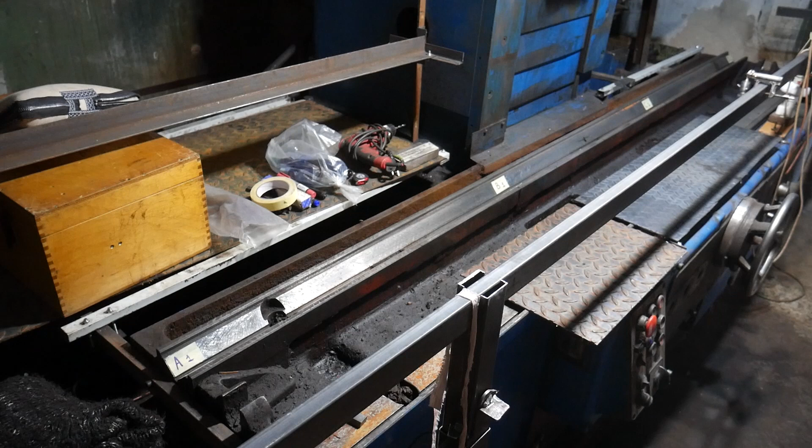I continue working on the repair of the 3-meter guideway of the linear motion system on the surface grinding machine. This repair has been previously covered in my videos number 20, 25, 26, and 27. The process of such a repair is complex and multi-staged, and I believe it's better to present it in parts, with each part dedicated to a specific action as it is completed. I've now completed another phase of the work, so it's time to make and publish the next video.

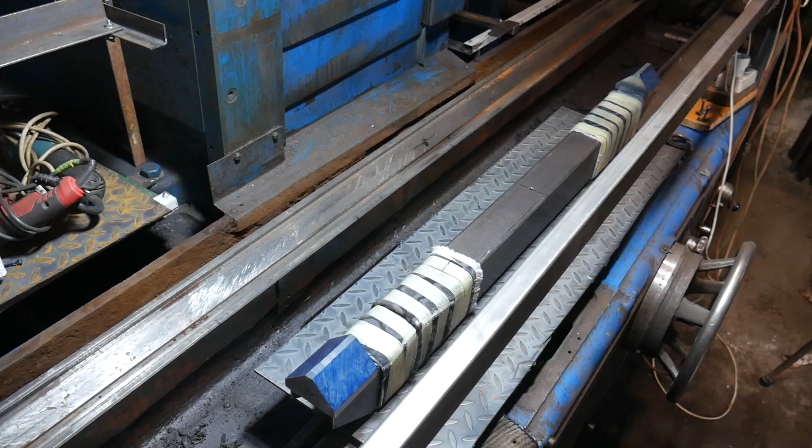Up to this point, I've already accomplished quite a lot. First, I conducted the necessary measurements of the guideway's condition before the repair. After that, I began the process of restoring its straightness.

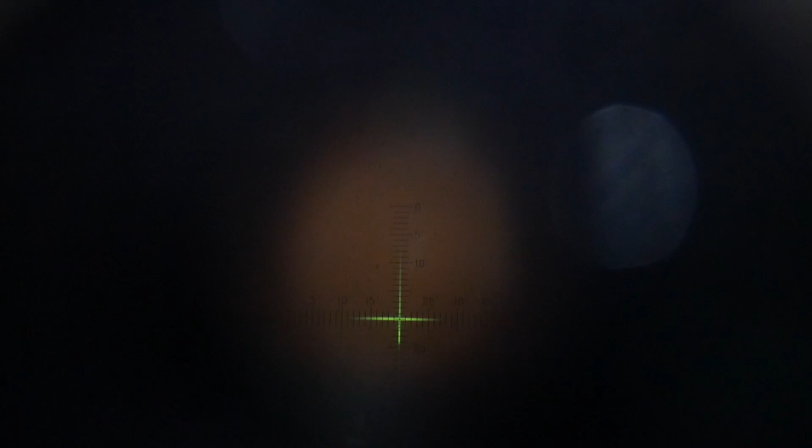Initially, using the autocollimator, I determined the geometry of the guideway before starting the repair. It turned out that the wear was such that the maximum difference between the highest and lowest points on the guideway surface was slightly over 0.5 millimeter. I say approximately, because the worn, curved surface complicates precise measurements, and extreme accuracy at this stage isn't necessary. The main goal was to get a general understanding of the guideway's geometry to know how to proceed.

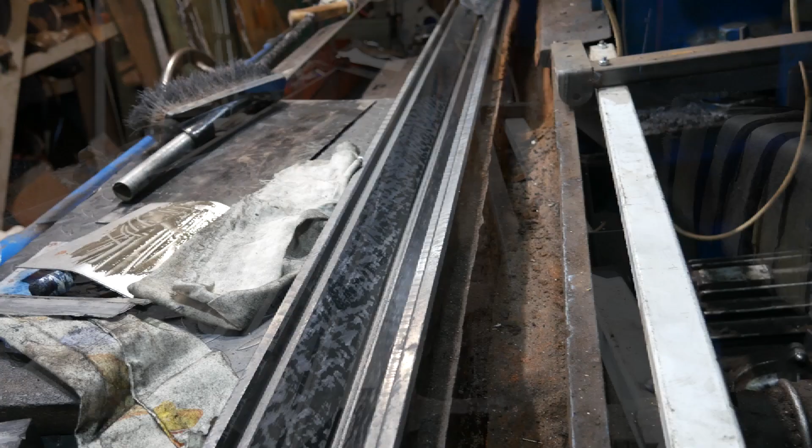Then I started scraping the surface, controlling its geometric condition with the appropriate tools and instruments, primarily the autocollimator. As shown in my previous videos, the initial stage of scraping was successfully completed, and the surface irregularities were reduced by an order of magnitude, meaning the deviation has been reduced by a factor of 10. Now, the irregularities of the main prism on the guideway are no longer over 0.5 millimeters, but are around 0.03 to 0.04 millimeters. This is already a good result.

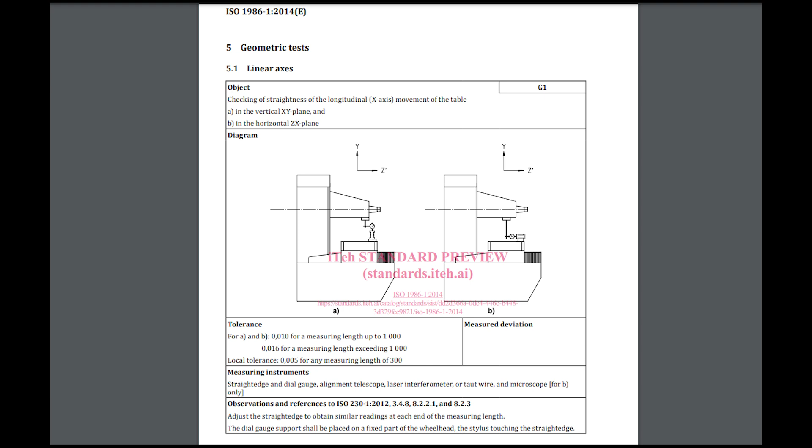At this stage, the machine is likely to meet its accuracy requirements for surface grinding machines, which according to ISO standards, allows for an error of up to 0.01 millimeters over a working distance of 1000 millimeters.

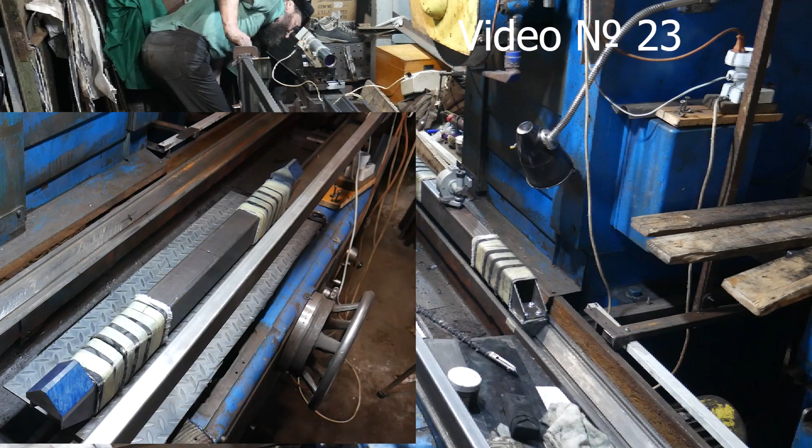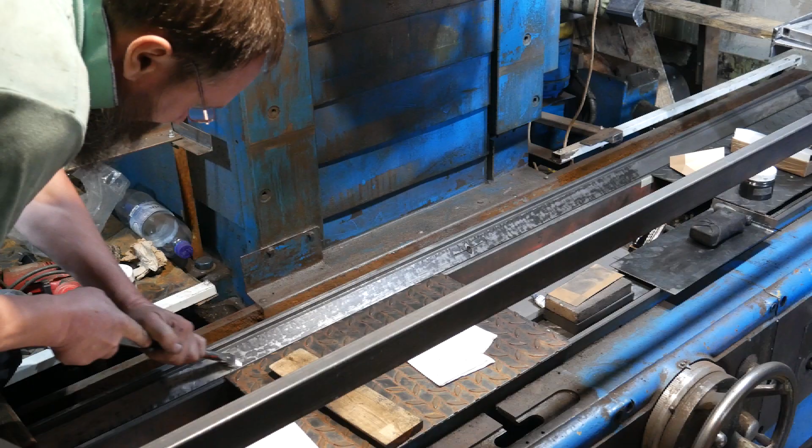However, my measuring tools and instruments, including the straight edge with an accuracy of about 1 to 2 microns, which I made myself using my own original measurement and machining methods, partially shown in video number 23, and the autocollimator, as well as the mirror holder with precisely prepared supporting prisms spaced 1 meter apart, which I also made myself, and the spirit level on a prismatic base, featured in this video, allow me to achieve even greater accuracy for this guideway, up to 5 microns over its entire 3-meter length.

Thus, the work continues. With a willingness to invest significantly more time and effort, it's possible to achieve even higher accuracy, below 5 microns.

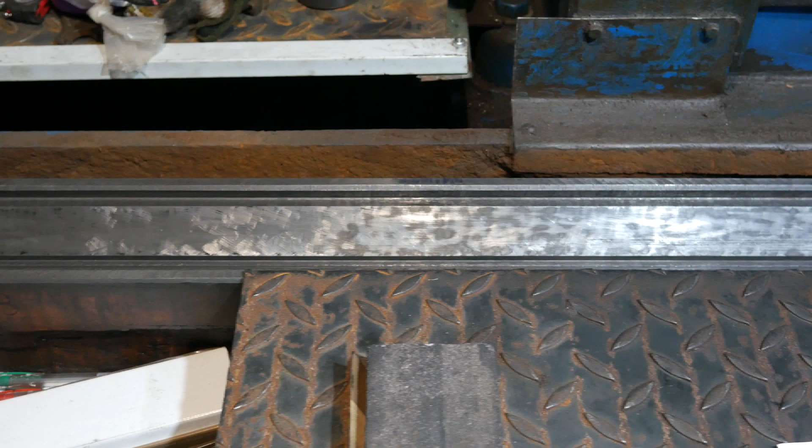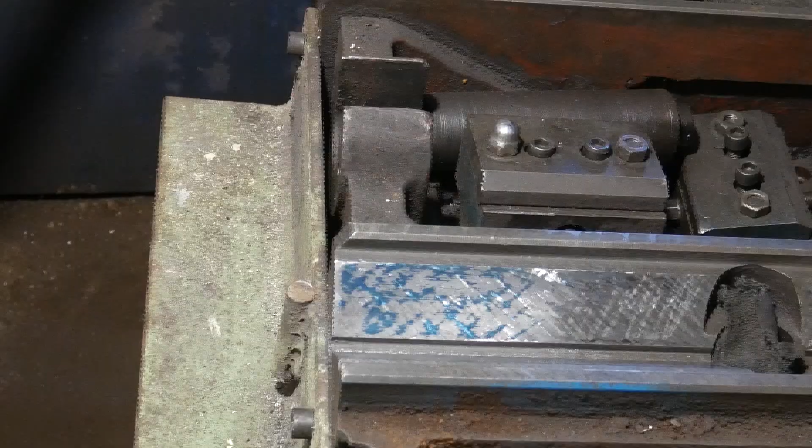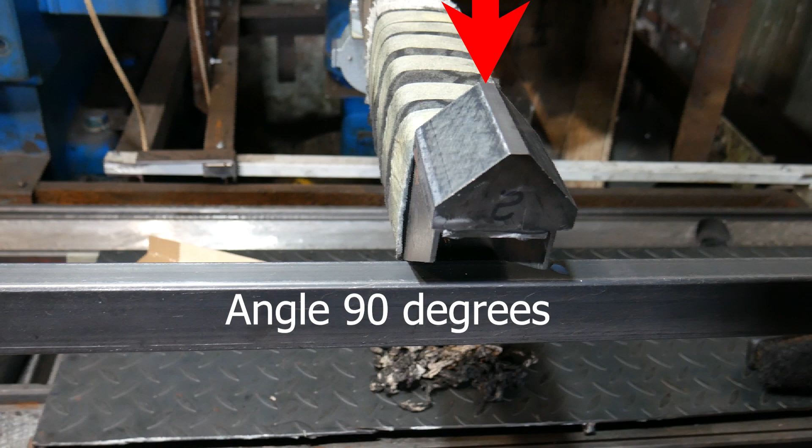I scraped each of the opposite sides of the prism separately. Although I used specially created reference support pads on specific sections of the guideway being repaired, as shown in video number 26, which not only served as depth references for scraping but also as angle references for the position of the guideway line, the angle between them, which should be close to 90 degrees, as fixed on the prisms of my autocollimator mirror stand, is now not strictly defined.

This is due to minor and expected inaccuracies that occur during the preliminary scraping phase. It may be slightly greater than the desired 90 degrees, or slightly less, or it may be unstable in different sections of the guideway.

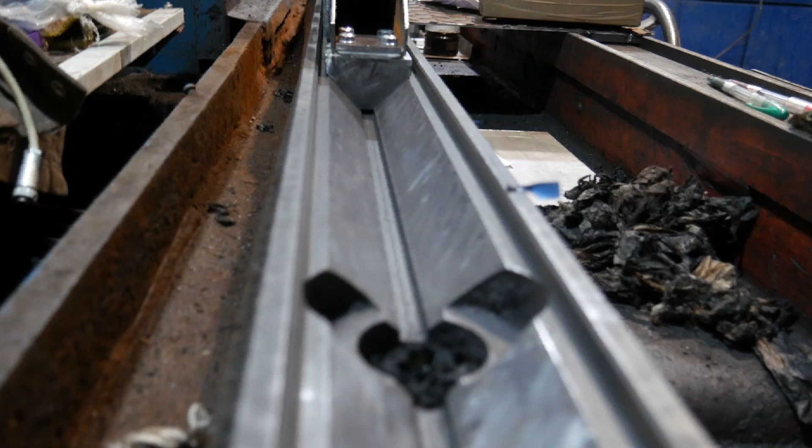It is necessary to verify the actual situation. What I see right away is that the angle of the guideway is slightly greater than the angle on the prisms of the mirror stand. This suits me at this stage of scraping.

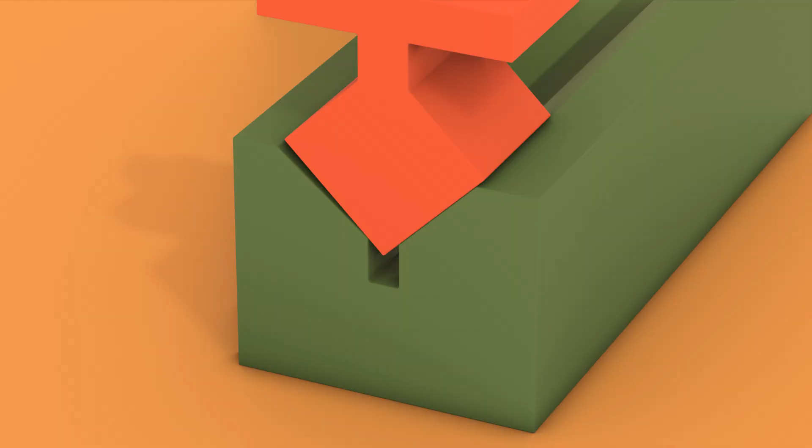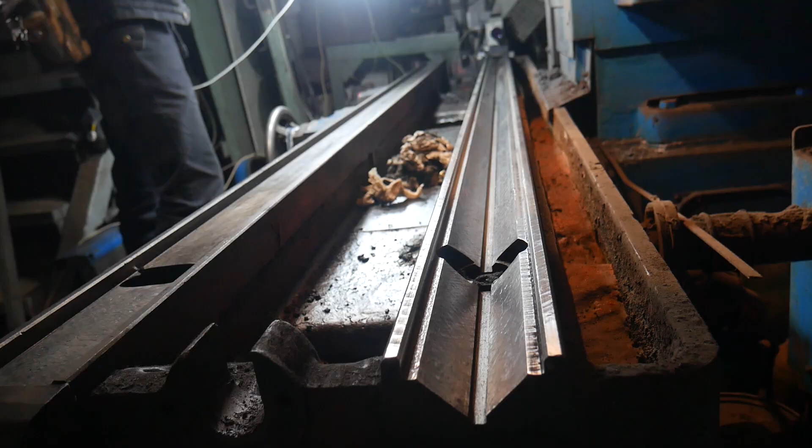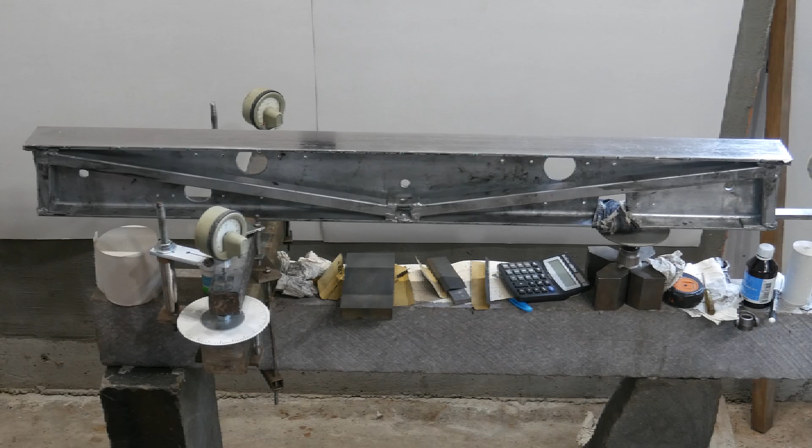However, it means that by relying on the autocollimator readings, I am achieving straightness along the lower edges of the guideway lines, which contact the prisms of the mirror stand, from where the information is fed to the autocollimator. The upper lines, on the other hand, may become distorted, as the straight edge I use, while highly resistant to bending due to its construction, is quite weak against twisting. As a result, I will most likely experience some degree of error on the guideway surface, since I am not fully controlling the upper lines with the autocollimator at the moment.

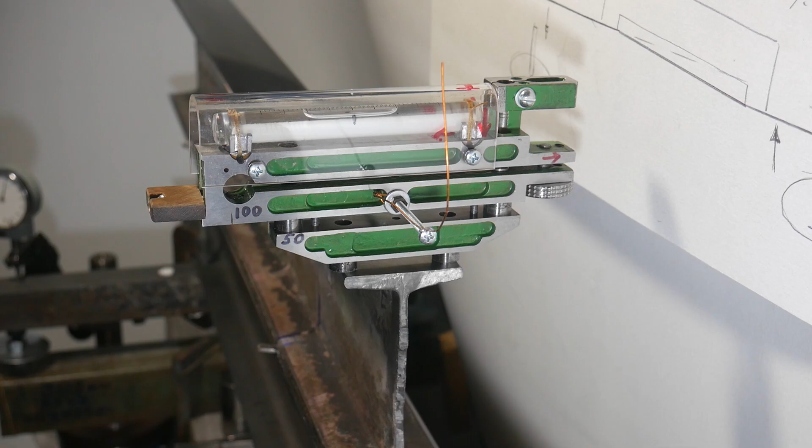For example, you can observe how little force is required to twist an I-beam. I am applying force with a nylon tube, specifically a pen cartridge. Of course, the actual amount of twisting is minimal, but in this scraping process, it is significant. The movement of the spirit level bubble reflects the elastic deformation of the I-beam.

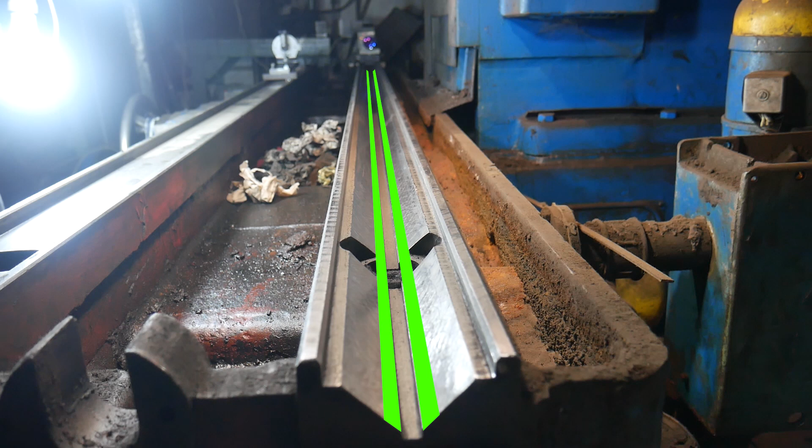Now, I need to understand how the angle of the guideway changes along its entire length. I need to know how this angle changes, not relative to the opposite side of the guideway, but relative to the horizon. Once I have this information, I will be able to adjust my further scraping actions to create more precise geometry for the guideway.

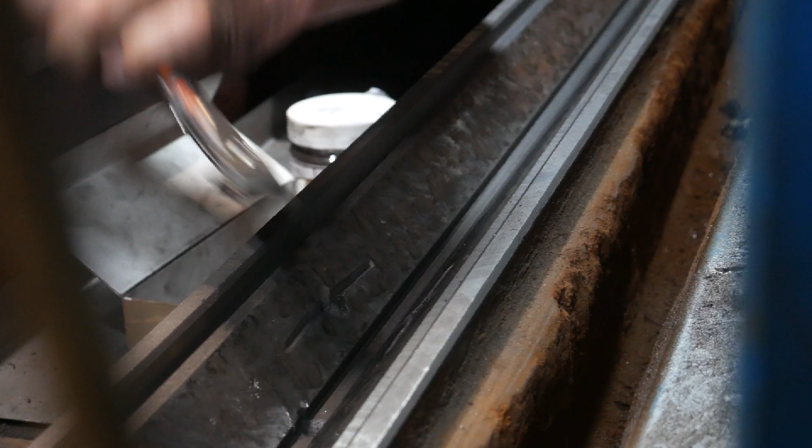At this stage of the work, measuring takes considerably more time than scraping. But due to careful measurements, scraping is carried out without errors, only where it should be. At this final stage of scraping, I work with a very sharp cutter, the force and thickness of the chips being small.

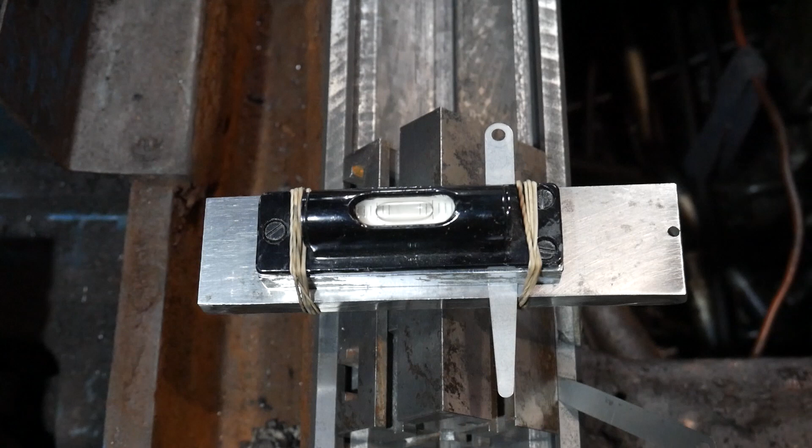Thus, I need to carry out the necessary measurements. To perform these measurements, I need to use a sufficiently sensitive spirit level mounted on a suitable base. I assembled it from appropriate components, which was not difficult, and it's now ready for use. A rectangular block is used, which is part of a set of universal jig components, UJC.

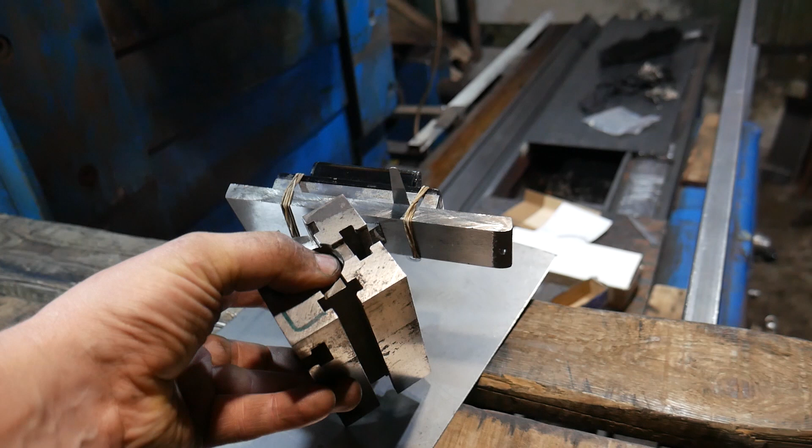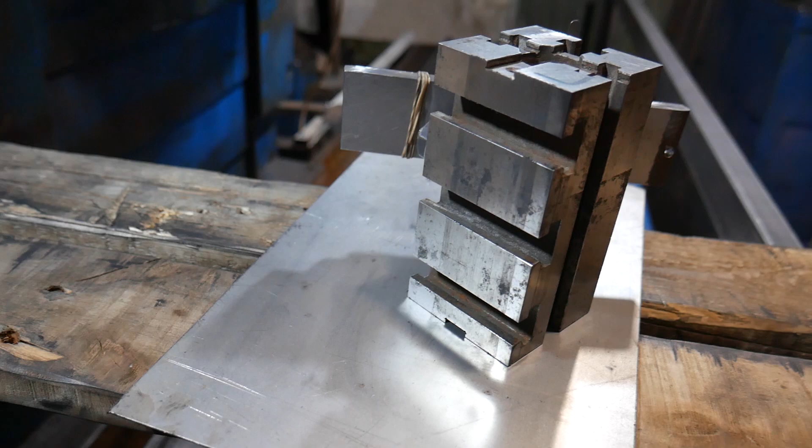I'll take a brief detour here. I'm curious to know if similar sets are used in the West and if you have access to such components. I've tried to find the answer to this question, but haven't seen anything like it on Western websites, which surprised me. Are they not common in the West? What do their Western counterparts look like?

I use them quite often and have already assembled quite a few of these components in my workshop. They are very useful in a workshop setting. However, I haven't seen Western colleagues use these kinds of components. Please write about this in the comments.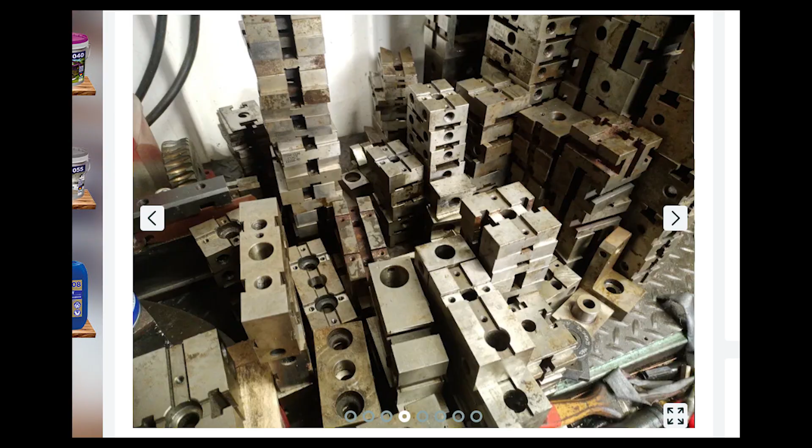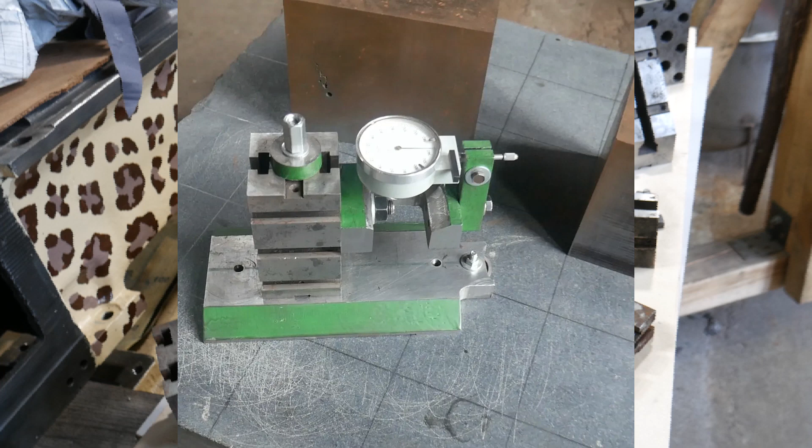Here in Ukraine, there are many of these components. On Soviet factories, they were used like a construction set to quickly assemble various technological fixtures, i.e. technological tooling. Large factories had separate workshops with thousands of such components, which allowed for the rapid assembly of the necessary tooling for a specific task. When the fixture was no longer needed, it was disassembled back into components. There are a huge number of different varieties of these components. I've managed to collect some of them in my workshop. These components often help me fix workpieces on the milling machine table and are also useful for many other tasks. Sometimes, I even use them as part of measuring instruments.

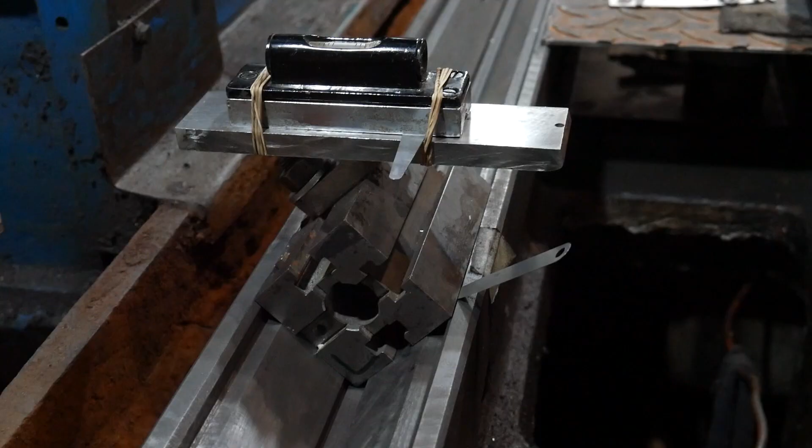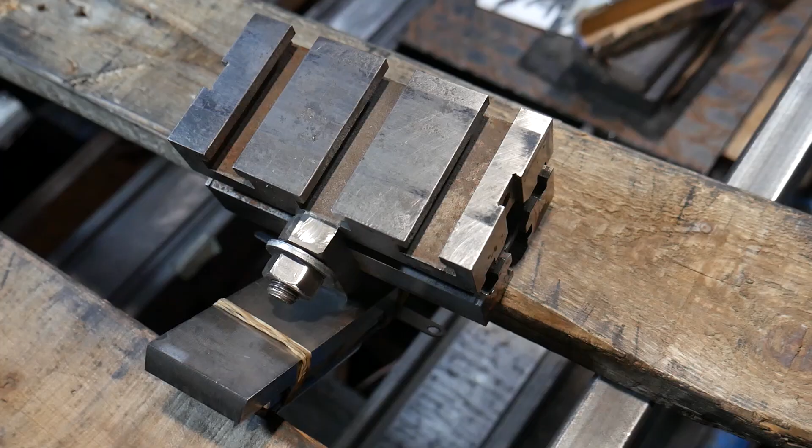Returning to the topic. Two faces of this block will interact with the guideway, but it's important to clarify that only one face will actually be in contact, this one here. I'll press it against one of the sides of the V-shaped, prismatic guideway, and the angle of that side will be measured.

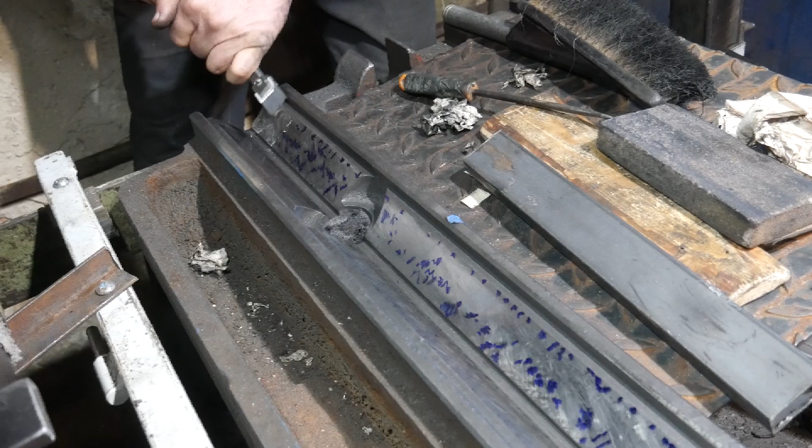As you can already see, there's a visible mark from this interaction, which appeared while I was filming the preliminary material for this video. You can clearly understand from this friction mark how the interaction happens. The mark is more pronounced along the edges, but remember, the scraping is not yet finished.

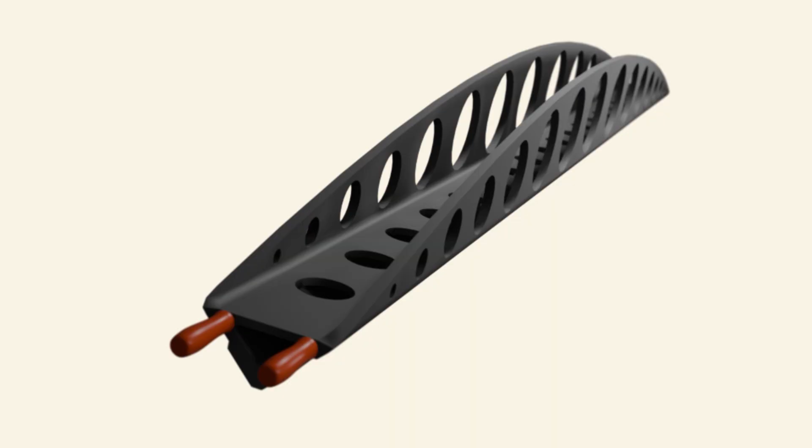It's worth noting separately that during the scraping process, I had to postpone controlling the angle between the opposite sides of the V-shaped guideway. Since I don't have a V-shaped straight edge with a pair of reference surfaces, and I'm working with a straight edge that only has one working side, the angle between the opposite sides of the prism may be slightly off.

However, in this case, for this machine, there's no strict need to maintain a specific angle for the prism's trough. Here it's 90 degrees, and a slight deviation is acceptable. Such a minor deviation will not affect the machine's functionality. A 0.04 mm feeler gauge filled the gap, which is not a problem, but it's preferable to keep this in mind and adjust the further scraping accordingly.

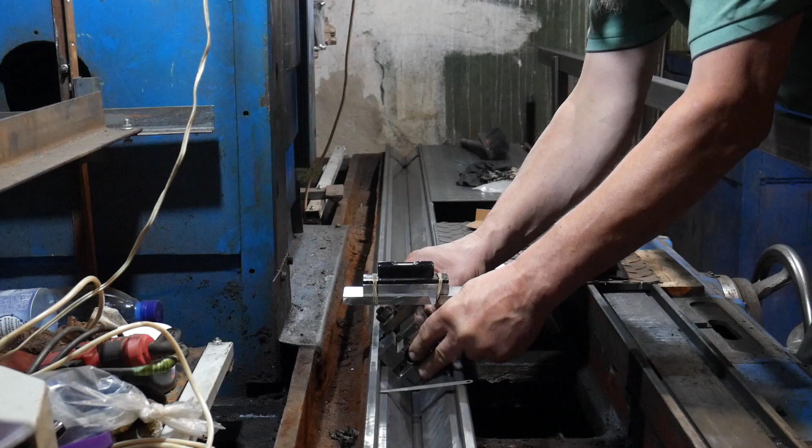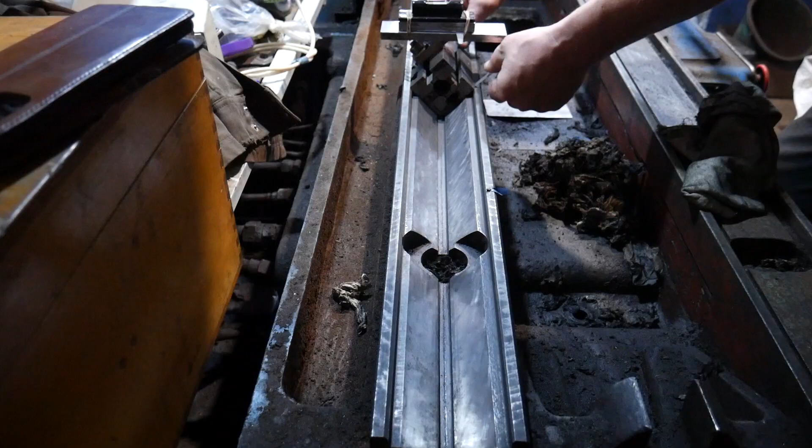As I mentioned earlier, I now need to additionally control the position of both sides of the guideway prism along their entire length through corresponding measurements with the spirit level. Now I need to check for twist, that is, whether the angle relative to the horizon is stable or how much it fluctuates. I'm ready to begin this measurement.

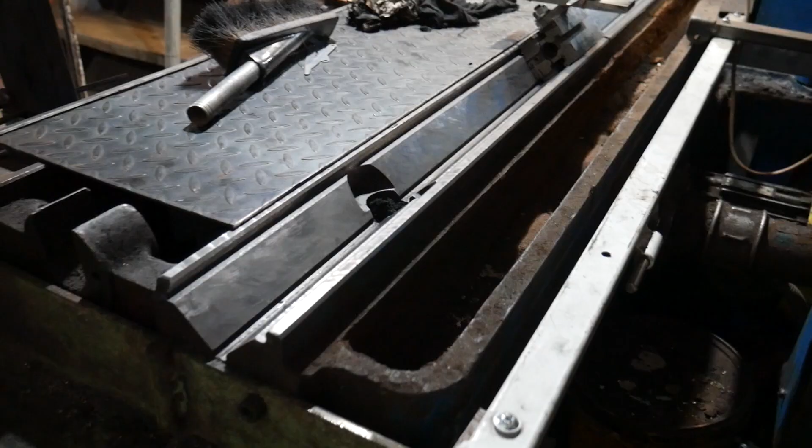The process of these measurements is simple and straightforward. I measure the angle of each of the two opposite sides of the prism along the entire length, with half-meter intervals. This interval allows me to create a sufficiently detailed map of the surface.

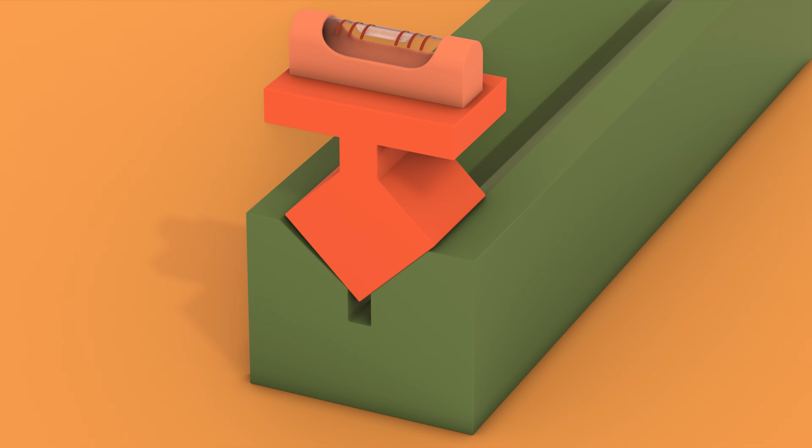For measuring the angles of this guideway, the spirit level with a sensitivity of 1 arc-minute per division of the scale worked very well. Calculations show that the bubble moving by 1 division of the scale corresponds to a drop or rise very close to 1/100th of a millimeter on the corresponding edge of the prism.

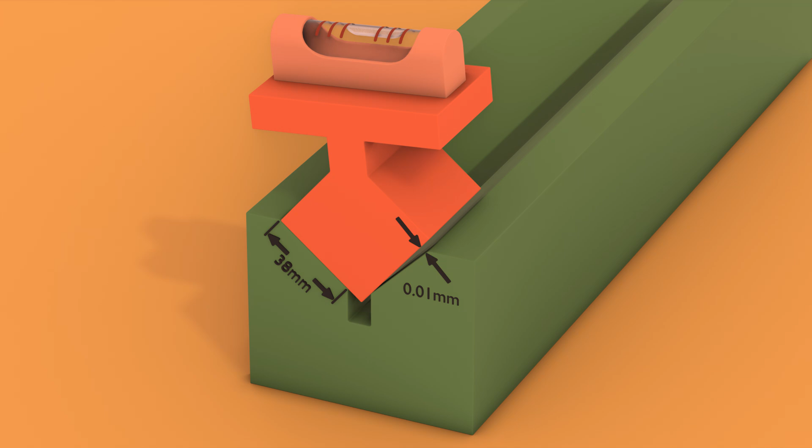At this point, I am measuring the opposite side of the prism, pressing the working surface of the spirit level base tightly against it. I compensate for the gap on the second side of the prism with a feeler gauge selected to fit. I conduct the measurements and record the results.

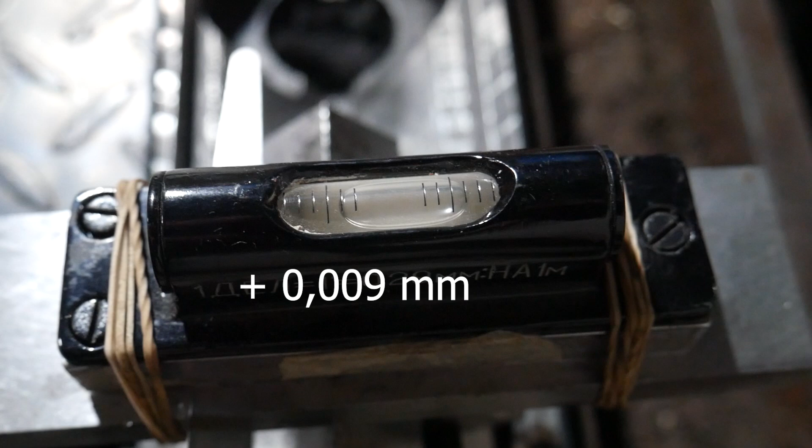Now I flip the platform with the spirit level and measure the second, opposite side of the V-shaped prism in the same way. Thus, the first and second sides of the prism are measured.

I measure the slopes on the second, nearest line in exactly the same way.

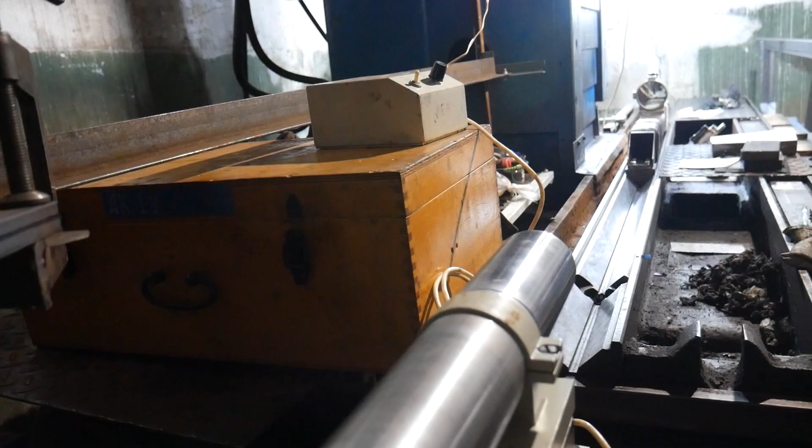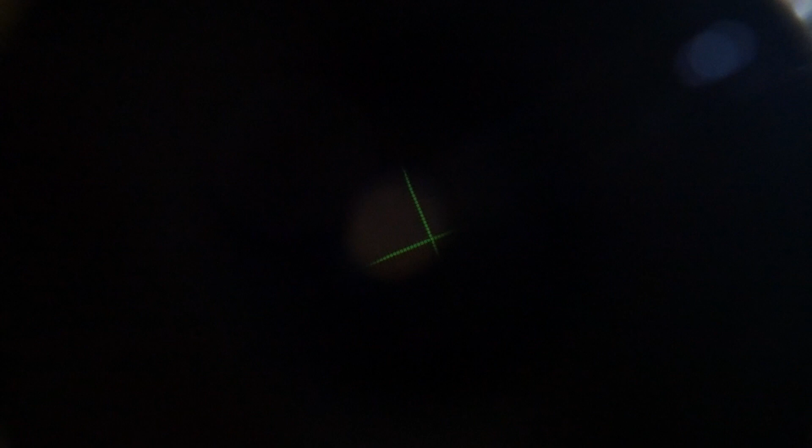Now the stand with the mirror has been moved to a position closer to the autocollimator. And now the stand with the mirror rests on the two most distant points. After this measurement, I understand the state of the general straightness of the guide.

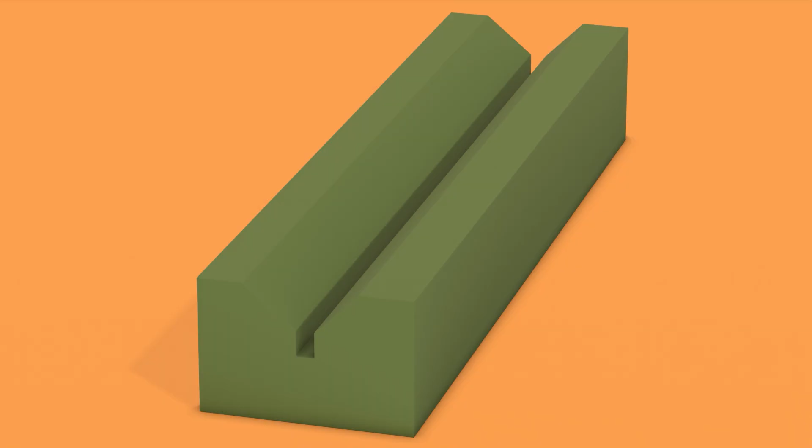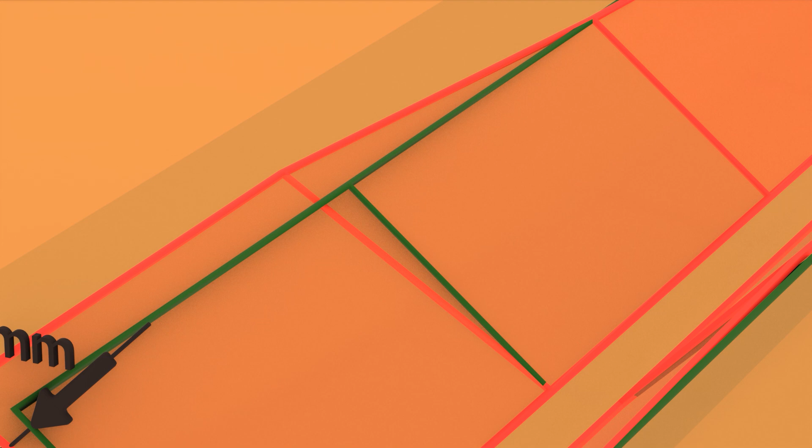These data have been processed. I visualize them, as it will be more convenient for me to use them in this form for further scraping. These data will help me achieve straightness on each side of the prism without twist. Thanks to this information, I will understand and take into account the current state of the guideways, allowing me to scrape cast iron from the guideways only where necessary.

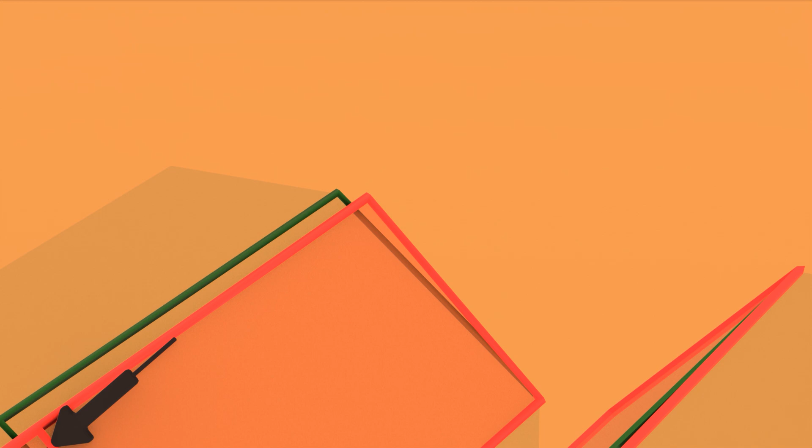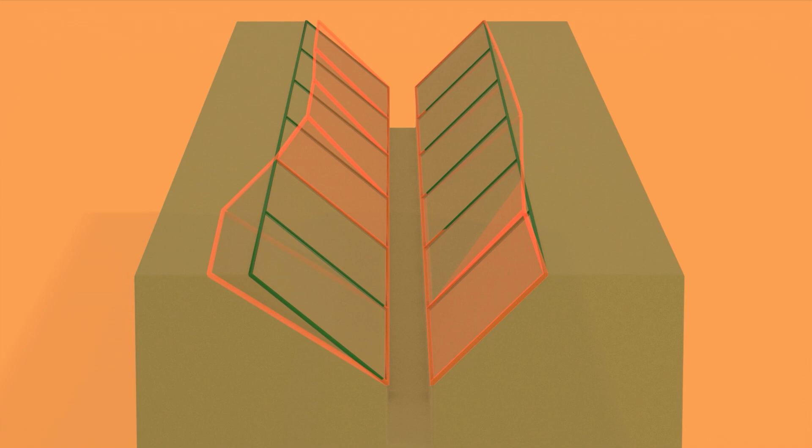This is exactly how I should remove the cast iron from the surface, just as shown in the animation, to get closer to a perfect, flat shape.

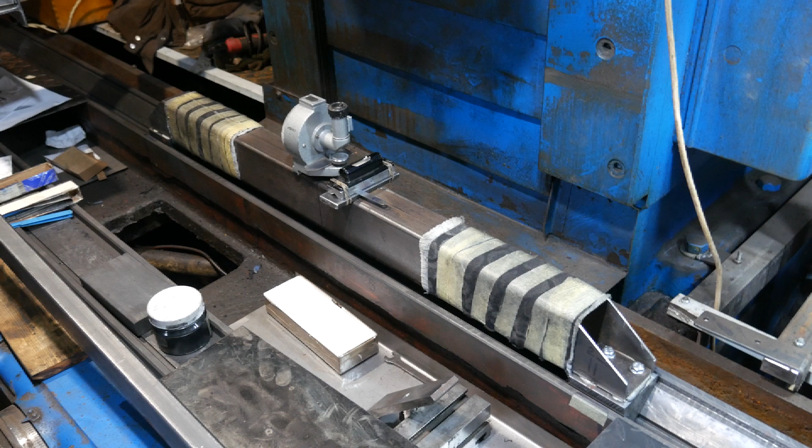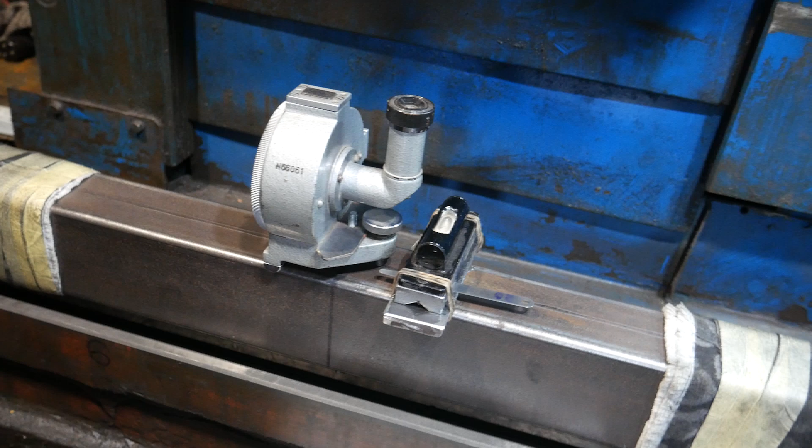Moreover, to improve the quality of measurements, it would be preferable to mount the spirit level on the autocollimator mirror stand at this point, which would positively affect the accuracy of the guideway geometry control.

Now there's only a little work left to do, and this 3-meter-long V-shaped guideway will become straight, with a deviation from straightness of less than 1/100th of a millimeter. The machine repair continues, so stay tuned for future updates.

In the next video, I will likely finish scraping this V-shaped guideway, and after that, we will move on to the second, flat horizontal line of this linear motion pair. Thank you for your attention, and goodbye.